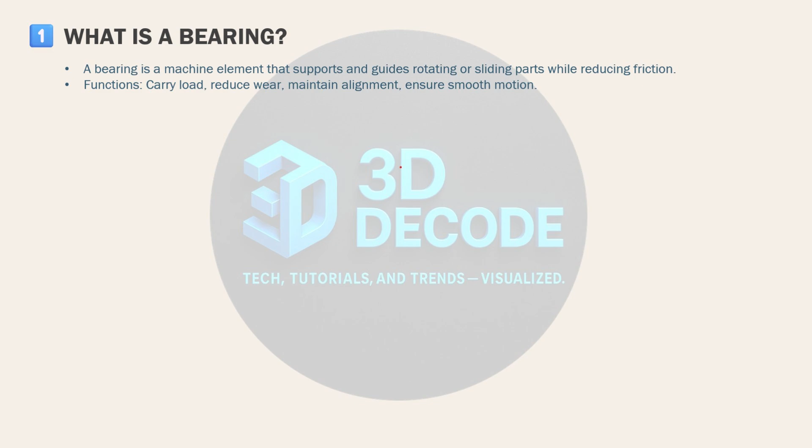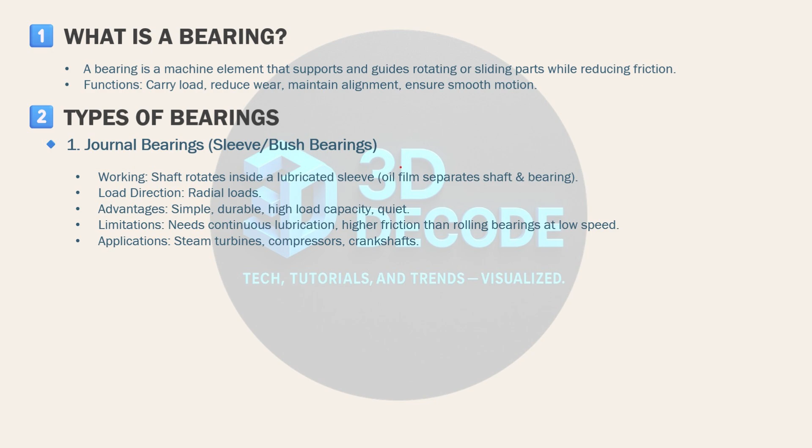Types of bearings. 1. Journal bearings, sleeve or bush bearings. Working: the shaft rotates inside a lubricated sleeve, where an oil film separates the shaft and bearing. Load direction: radial loads. Advantages: simple, durable, high load capacity, quiet. Limitations: needs continuous lubrication, higher friction at low speed compared to rolling bearings. Applications: steam turbines, compressors, crankshafts.

2. Thrust bearings. Working: designed to take axial loads along the shaft axis. Types: flat plate, tilting pad, collar thrust. Advantages: handles high axial force, stable at high speeds. Limitations: needs precise lubrication, can overheat if overloaded. Applications: marine propeller shafts, vertical pumps, compressors.

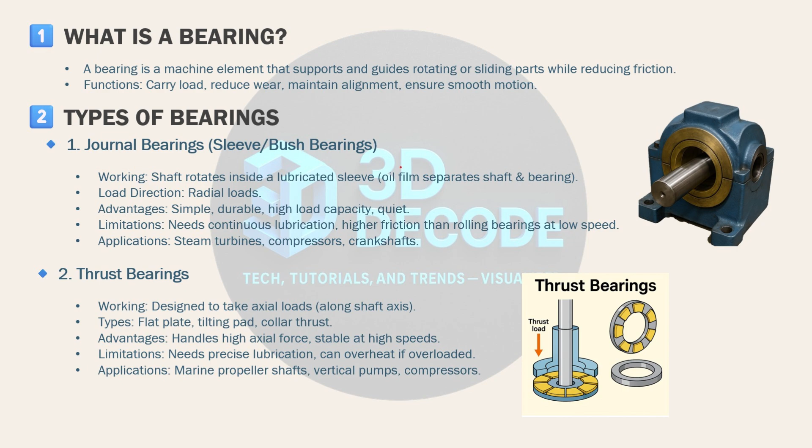3. Rolling contact bearings, anti-friction bearings. Working: rolling elements such as balls or rollers sit between inner and outer races to reduce friction. Load types: can take radial, axial, or both. Subtypes: ball, cylindrical roller, tapered roller, spherical roller, and needle bearings.

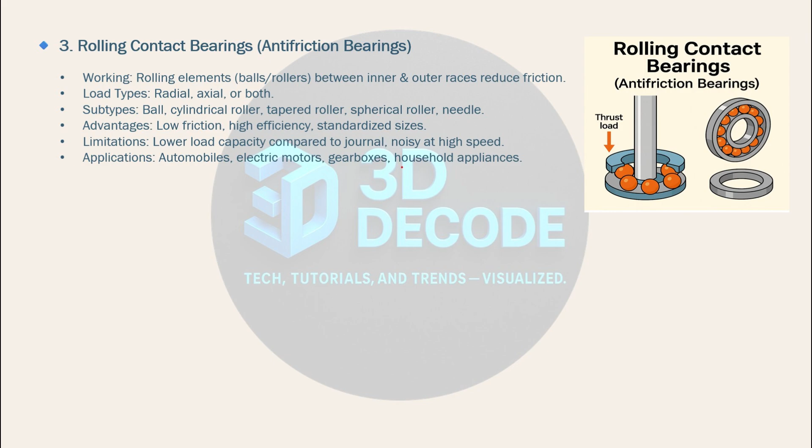Advantages: low friction, high efficiency, standardized sizes. Limitations: lower load capacity compared to journal bearings, noisy at high speed. Applications: automobiles, electric motors, gearboxes, household appliances.

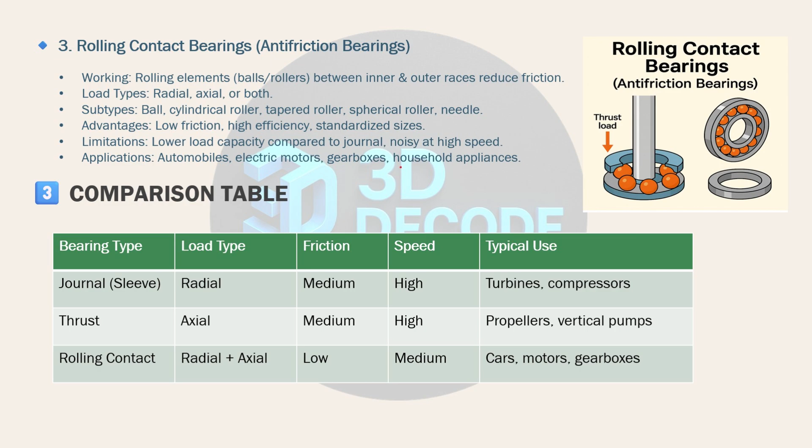Here's a quick comparison of the three types of bearings. Bearing type, load type, friction, speed, typical use: journal (sleeve): radial, medium, high, turbines, compressors. Thrust: axial, medium, high, propellers, pumps. Rolling contact: radial and axial, low, medium, cars, motors, gearboxes.

Latest trends 2024 to 25. Magnetic bearings: no physical contact, used in high-speed compressors. Ceramic bearings: lightweight, high temperature, used in EVs and aerospace. Smart bearings: IoT sensors for vibration, temperature, predictive maintenance. Hybrid bearings: steel plus ceramic rolling elements for higher efficiency.

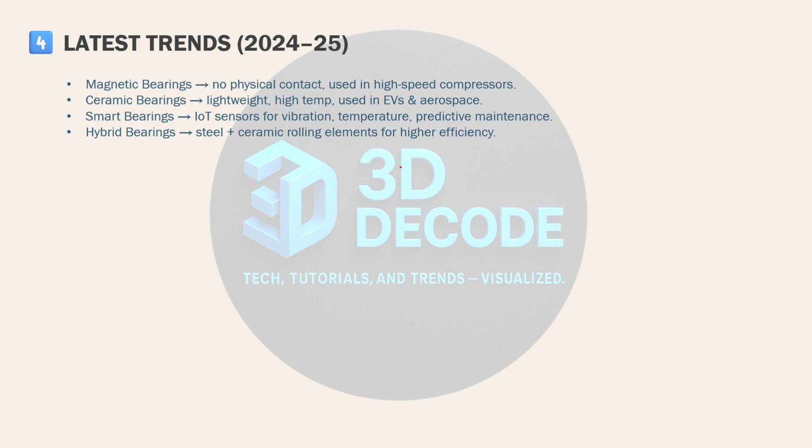Mini quiz: which bearing type is used in a car wheel hub? Journal, thrust, or rolling contact?

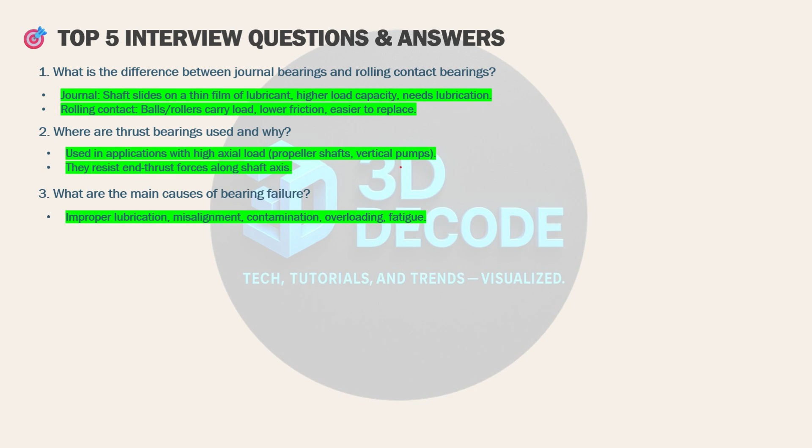3. What are the main causes of bearing failure? Improper lubrication, misalignment, contamination, overloading, fatigue. 4. What is the difference between ball bearings and roller bearings? Ball: point contact, good for moderate loads and high speeds. Roller: line contact, higher load capacity but lower speed capability.

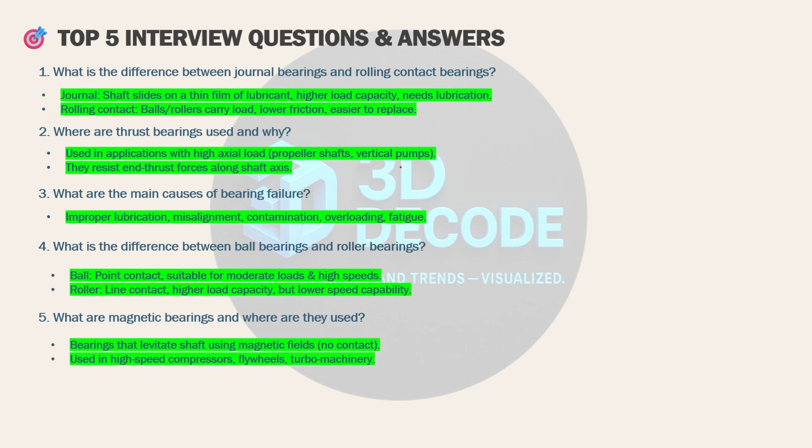5. What are magnetic bearings and where are they used? Bearings that levitate the shaft using magnetic fields with no physical contact, used in high-speed compressors, flywheels, and turbomachinery.

And that's the breakdown of journal, thrust, and rolling contact bearings. Simple in principle, but critical to every machine.